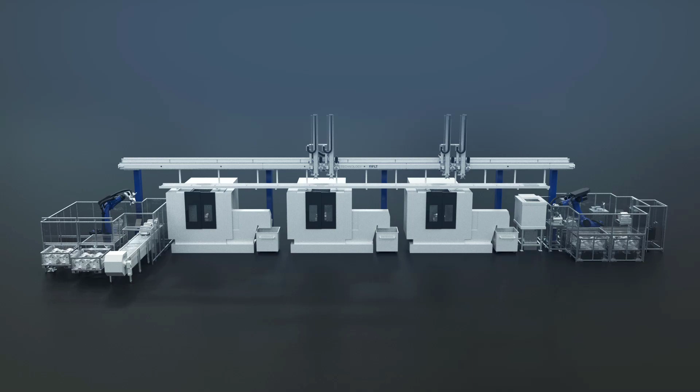The challenges facing the manufacturing industry in the light of Industry 4.0 require new solution concepts in many areas. As part of the KisPo project, an innovative solution concept was developed for the area of conveyor technology and production. The aim of KisPo was to develop autonomous and self-learning control software for so-called gantry systems based on machine learning

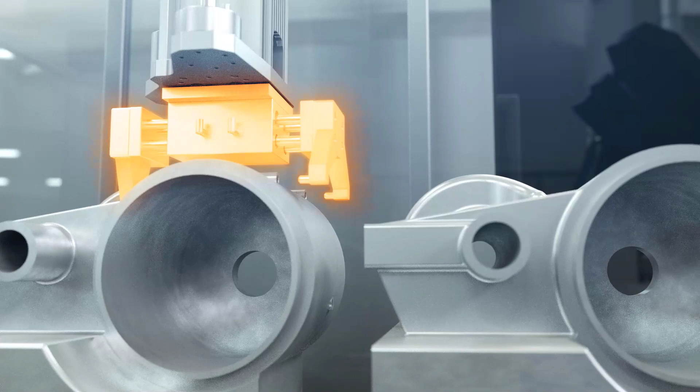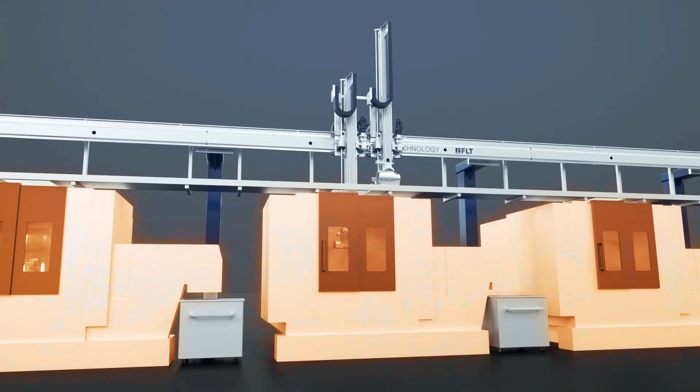and simulation methods. In gantry systems, shown here by the gantry manufacturer FLT, trolleys move fully automatically, horizontally, along an axis to production machines for loading or unloading. The vertical movement towards the machine is performed by a so-called gripper.

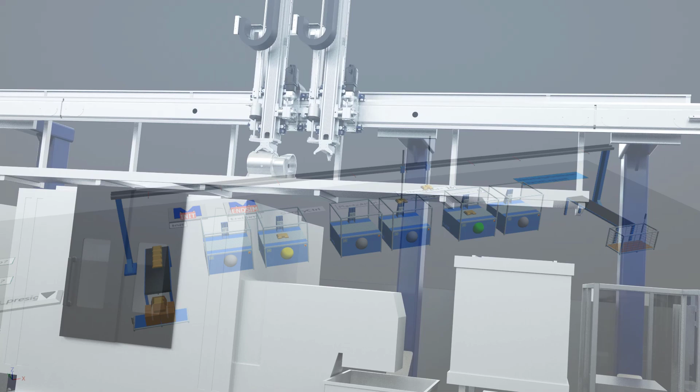According to the current state-of-the-art, gantry systems are controlled with the help of simple priority rules, which are often defined once, based on experience and then stored hard-coded in the control system. Digital twins in the form of simulation models are used for the planning of gantry systems and the validation of control systems. In KisPo, agents, so-called RL agents, were trained with the help of such models and the reinforcement learning approach, which can take over the control of the gantry independently and autonomously.

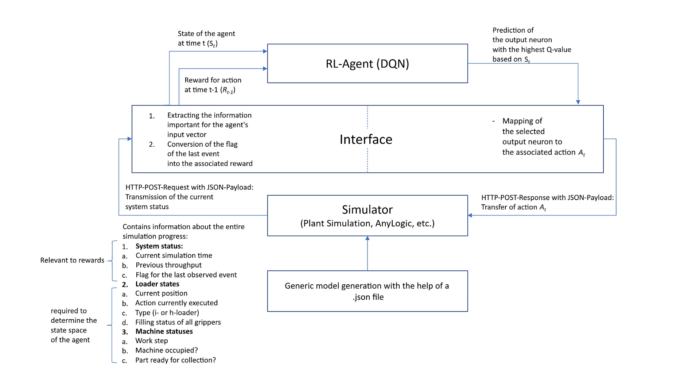The RL agent was developed on the basis of a Deep Q-Network, DQN. Neural networks are used for the agent's learning process. The agent learns the strategy for controlling the gantry from its interaction with the simulation model. The current status of the gantry system is transmitted from the simulator to the agent via an interface. The agent finds the appropriate action for this and transmits it to the simulation. Here, the action is executed and the next action is requested together with the new system status.

Gantry systems have different characteristics, depending on parameters such as the number of machines or the types of loaders used. In KisPo, 19 different configurations were examined, which can be summarized in the following categories. Gantries with one I loader and a different number of machines to be loaded. Gantries with one H loader and a different number of machines to be loaded. Gantries with two I loaders and a different number of machines to be loaded.

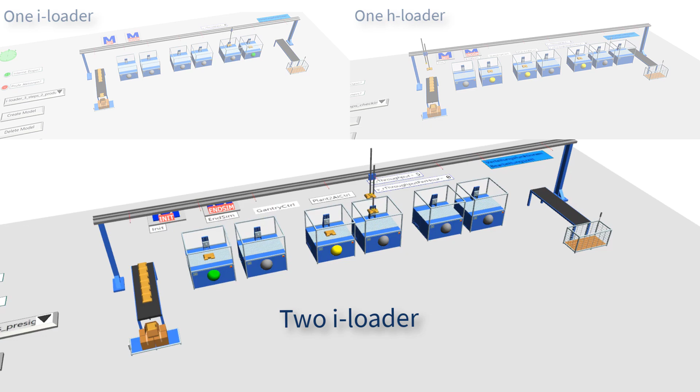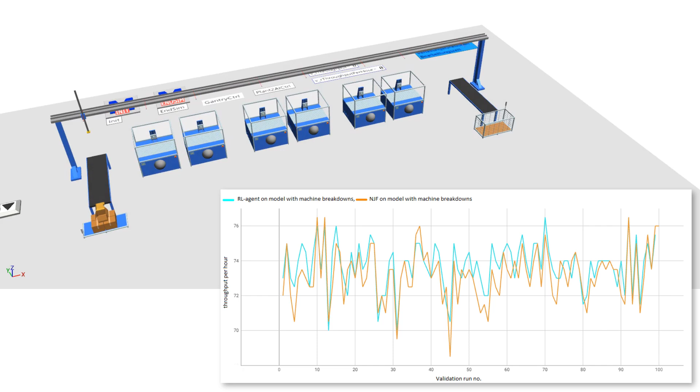You can now see the validation of a model with 3 production steps and 2 machines per step. The gantry has a carriage with a single gripper. The machines can break down and the feed via the conveyor is irregular. In the validation, the RL agent, light blue, was able to achieve a statistically significantly higher throughput than a conventional heuristic, orange, based on the shortest travel distances.

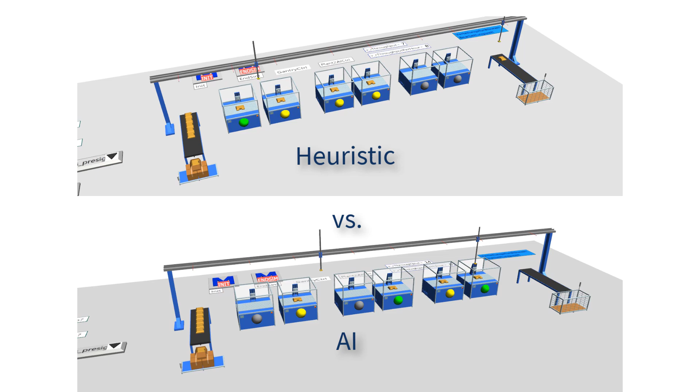In another model, the gantry is now served by 2 loaders. Here again, the RL agent can achieve better results than the heuristic. At this level of complexity, it is necessary for the heuristic to limit the travel ranges of the trolleys, while the agent learns the control independently using reinforcement learning.

Furthermore, the travel paths of the agents were analyzed using approaches from process mining. These provide users and production engineers with insights into the behavior of the learned control strategy of the agent and thus make it easier to understand.